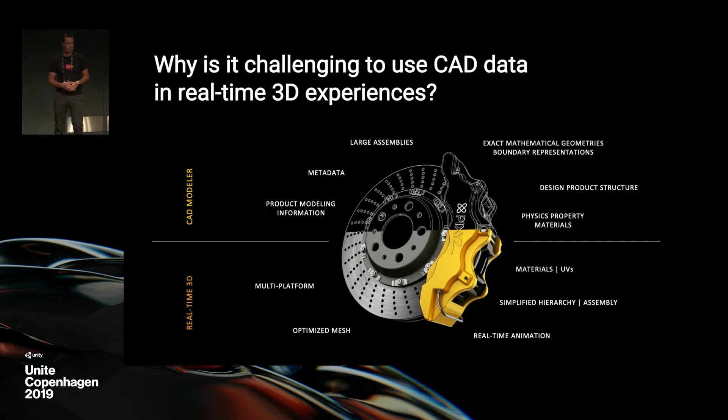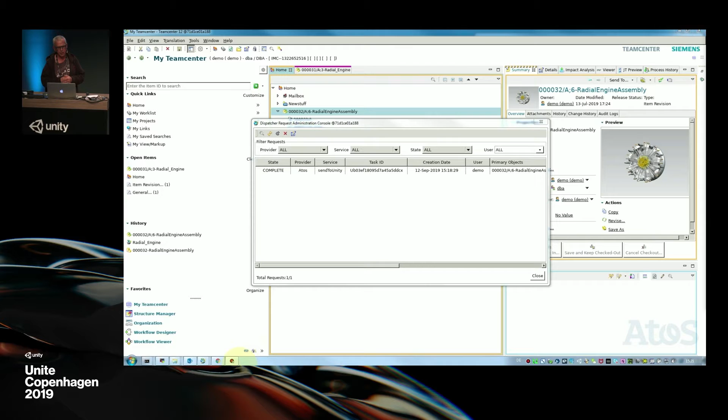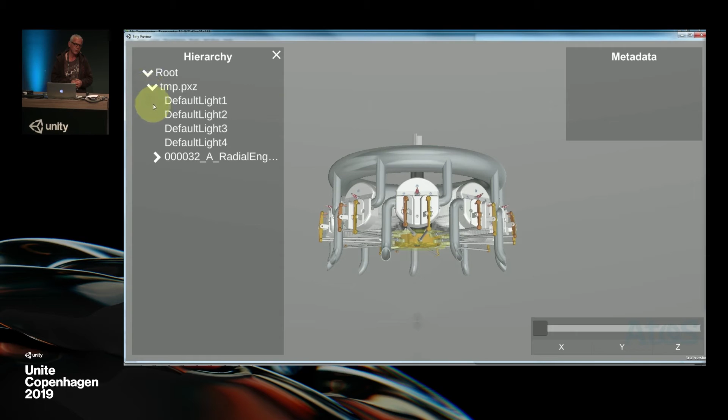Now I switch back to a folder in the file system, and we have all this stuff created by the Teamcenter Unity integration and the PiXYZ toolchain. We have a full-blown Unity experience here. What we tried to build is a tiny review application based on this JT model pulled from Teamcenter. We embedded this in a Unity project, and we can see the hierarchy here. We can select one of the parts, and it is highlighted.

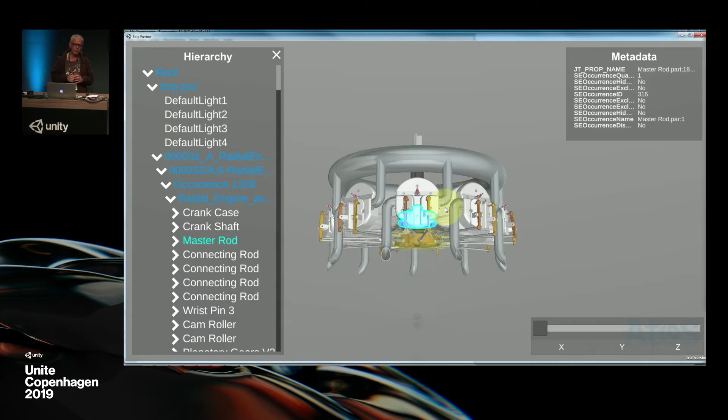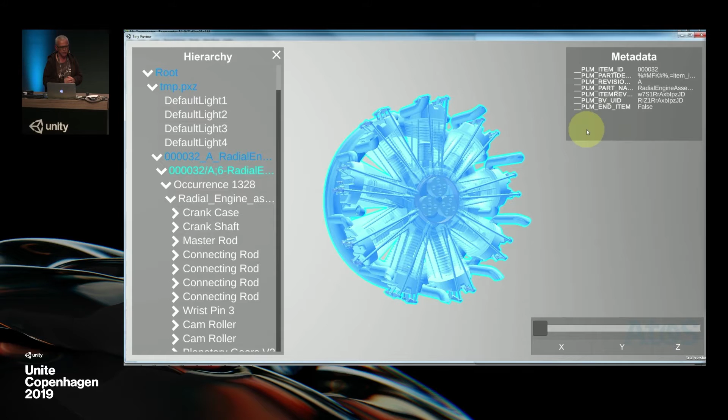It's a nice application, but I'm sure if you browse the show floor you'll see things much better than this. But it's only an example of what's possible with the power of this integration to build a complete Unity experience.

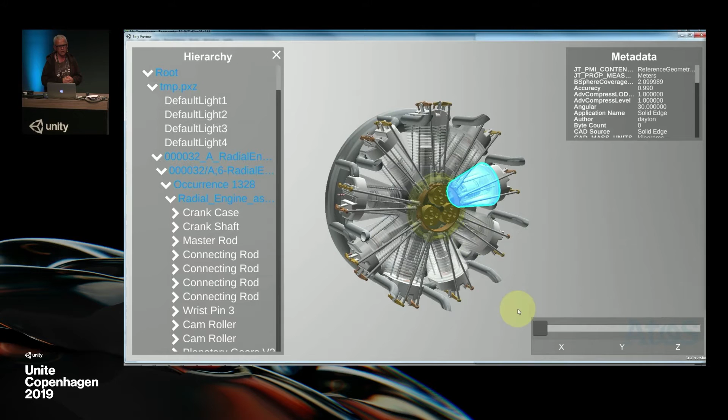We have a few nice features here — selecting parts, rotating this radial engine around, and even letting it explode to do a closer inspection. If something is obviously wrong, you can recognize it here.

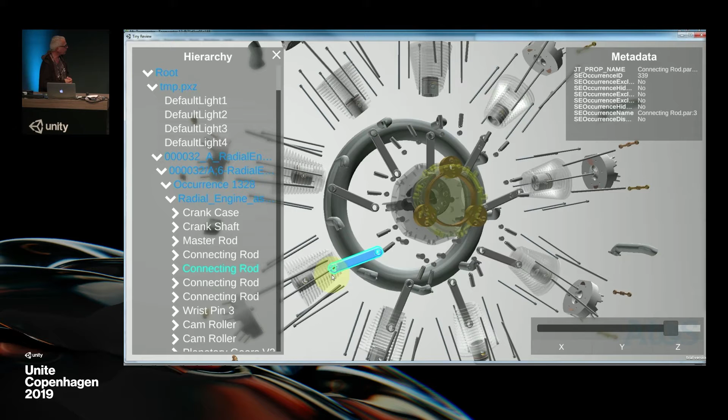It's just an example of what can be done automatically in headless mode to create this full-blown Unity experience directly out of Teamcenter, just by a few mouse clicks. So this is really the power of this integration — to create this with only a few mouse clicks.

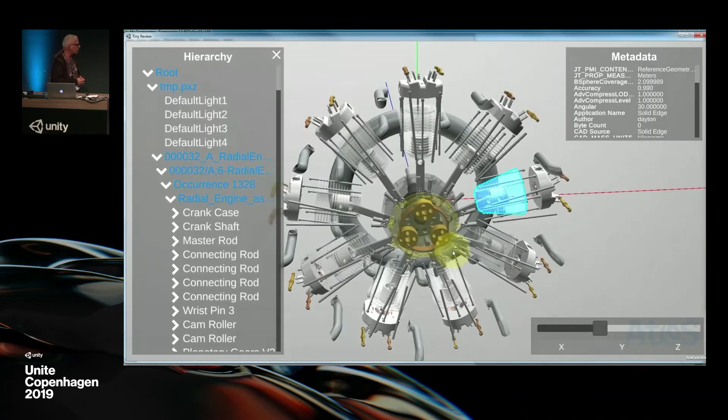And of course, it's also possible to create any other stuff useful in Unity, such as prefabs, asset bundles, or USD files. Everything the PiXYZ toolchain is capable of, we can create automatically, hiding this whole complexity into the Teamcenter workflows and letting it do its work behind the scenes.

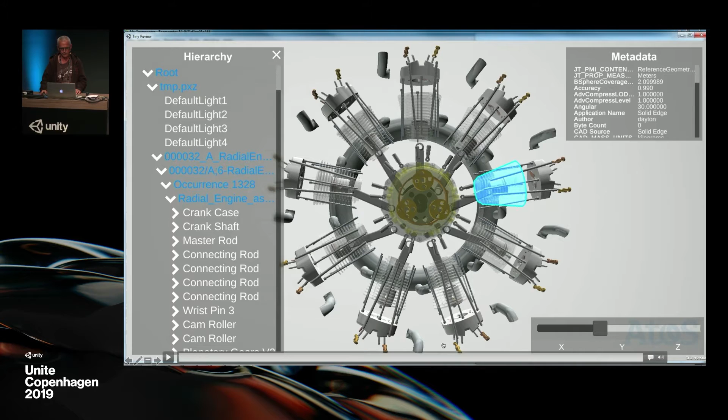So the last thing I want to show is — I adapted the 'rhythm of innovation.' I have to admit I'm a bit of a gamer also, and it's such fun to play around with Unity and all the options it offers.

I created this little movie based on the same JT file we saw in Teamcenter, and applied measured materials provided by Unity to get high quality surfaces on the radial engine, and added some scripting. To summarize: it's made with Unity, powered by Teamcenter because that's the source of the JT file, and enabled by PiXYZ and our integration work at Atos.

And let me show you what we've done.

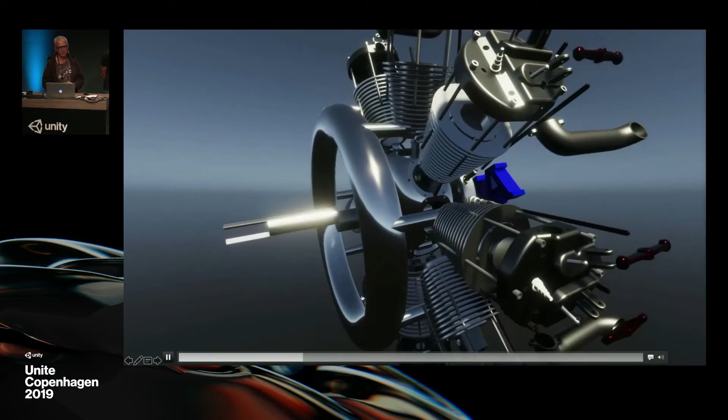I attended the keynote yesterday, and instantly it came to mind that there's some music missing here — since it's called 'rhythm of innovation,' we should have some soundtrack, like a heartbeat or something. But this has been done with a high-definition render pipeline and measured material applied to the surfaces. This is really exciting, what can be done with Unity.

This is really nice. So I hope we've been able to tell you a little about what we've been working on in the last months. I guess you got an impression of what we're able to do with the power of the PiXYZ toolchain and our integration work.